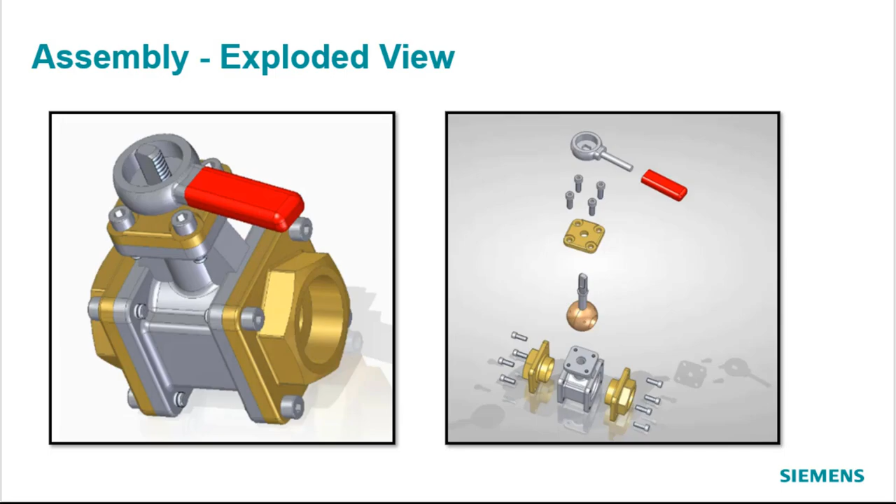Let's take a look at how to explode an assembly back into its individual parts. So start by coming out to your class files.

Assembly. Down at the bottom here you'll see valve done. So not valve, but valve done, to ball valve. And if it doesn't look like that, if it looks like just in a list, just right at the top, it's going to be ball valve. Double click on the ball valve.

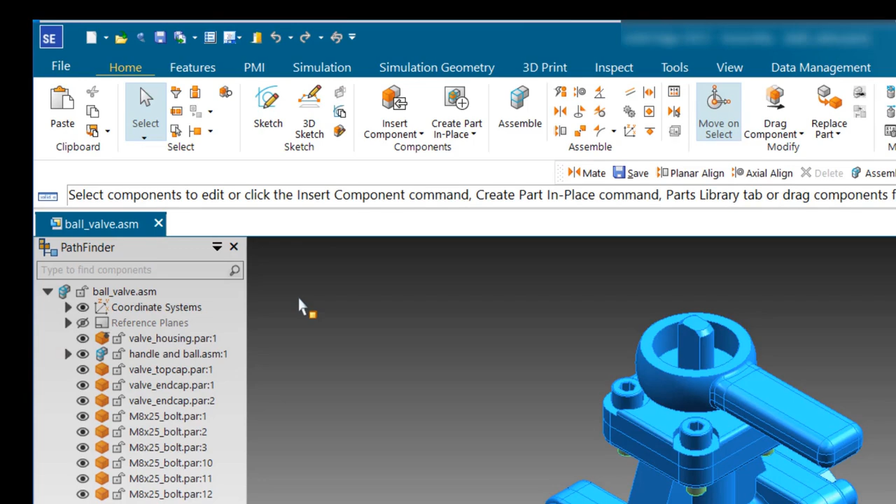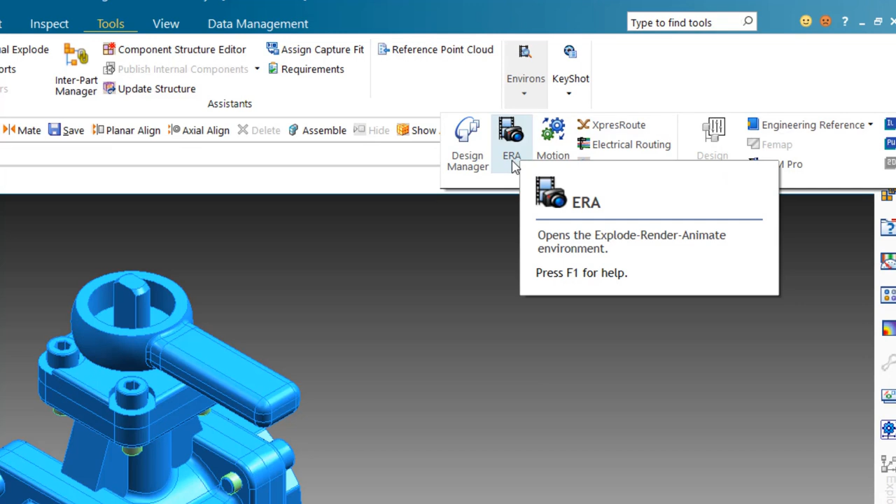And once the file's opened, come over to Tools. And if you've got a big computer, I think this would expand, but right now if it's on a smaller screen, it gets compressed. So I'm going to come over here to Environs, pull down on the Environs and come to ERA, and that stands for Explode, Render, Animate.

Now what I'd like to do is come up to Auto Explode, click on that. I'm just going to take the defaults, green check mark, and explode. Finish. So there the part is exploded.

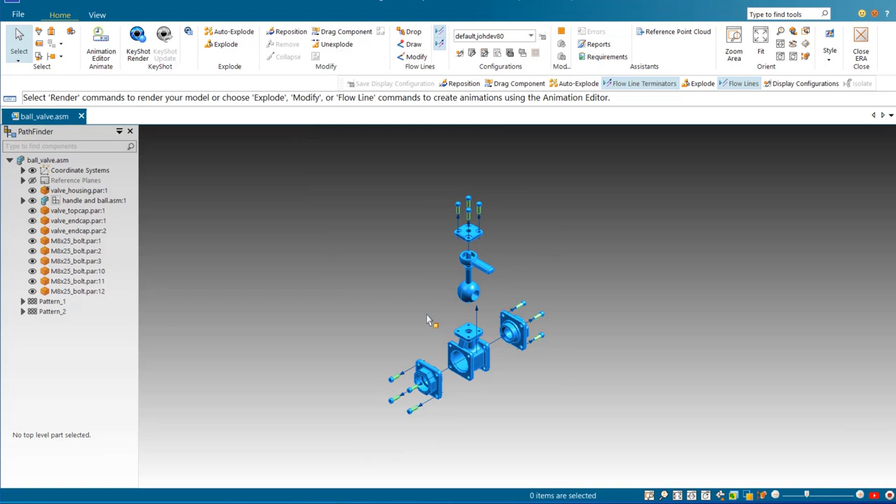Now if you'd like to reposition certain parts, you could come up to Reposition, and let's say I'd like this above the other piece. So I'll select the part, click on another part to place the part next to. So I'll come up here to the top of this screw, click on the screw, and then click on the arrow and say put it above that.

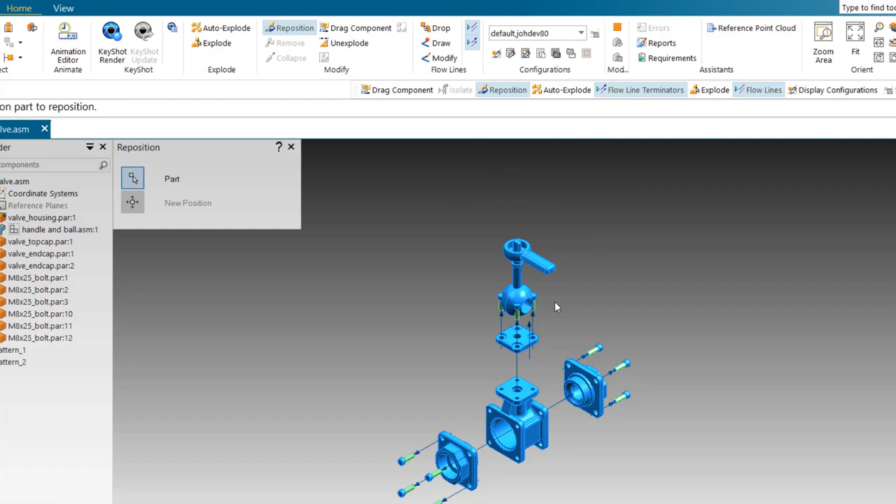Now the spacing needs to be fixed. So I come up to drag component, identify on the component, accept, and the green arrow, just pull that up.

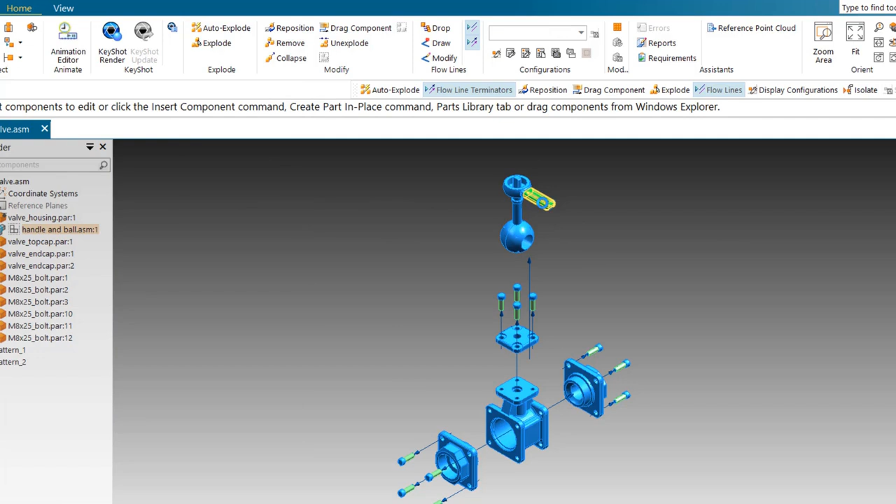Now say I'd like to pull this piece out from the valve here. So I identify that and try to drag component, but it highlights the whole thing. But I only just want the handle and it won't do that. So let's see what's happening there.

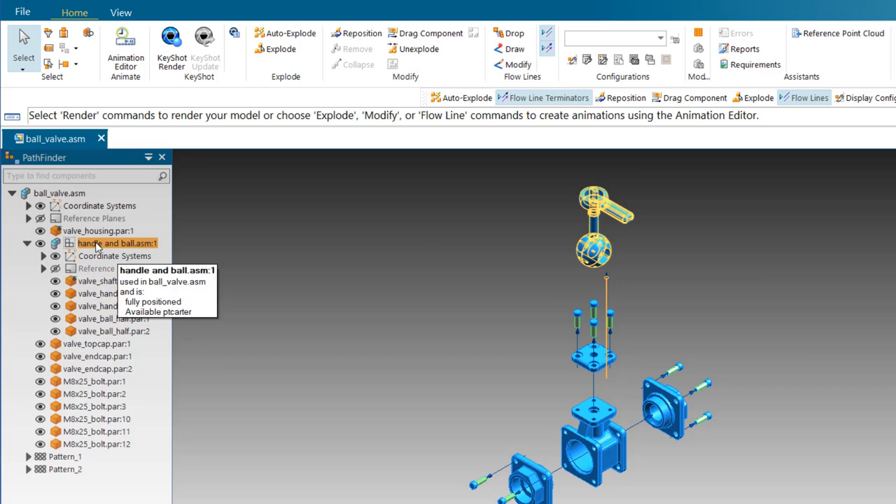If I come over here to the side, this is what's called a subassembly. So in the ball valve assembly, there's something called a subassembly. And that means this got put together separate. So I could come down here and expand on that and look at the subassembly right there under handle and ball. And so how do I just get this apart?

Well, I could come back to Auto Explode, and this time I want the subassembly. So I'll click on the subassembly, green check mark, explode. And now that's exploded the subassembly.

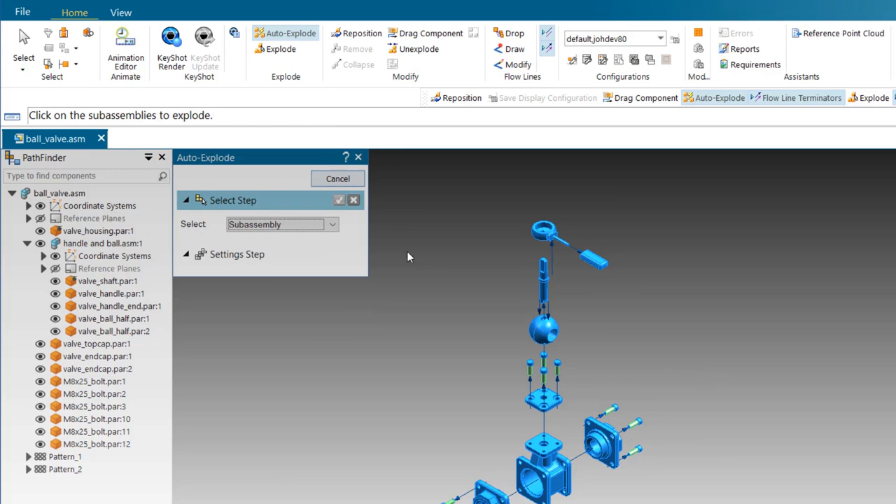And then I could come back, identify the handle now, and drag that out if I wanted to. Just drag along the line. So I could move that out.

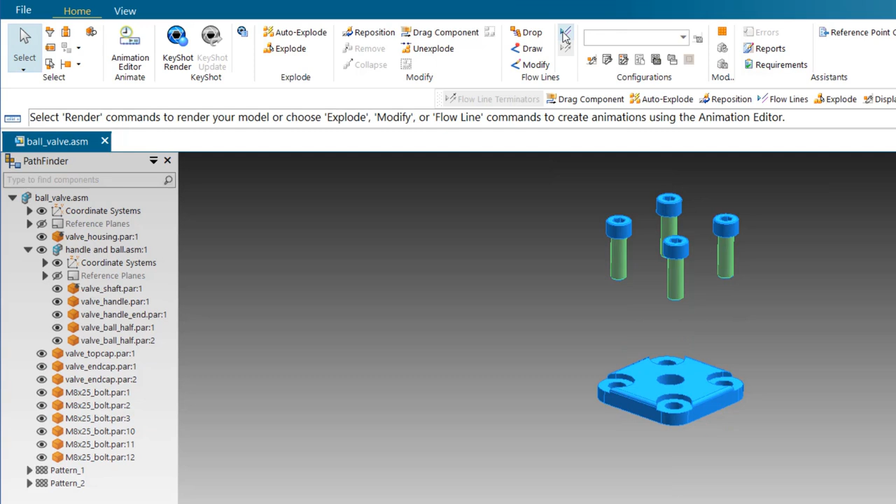And if you'd like to turn off the arrows, the flow lines, just come up here and turn those off. Just turn them back on. And if you'd like to just turn off the arrow heads, they're called terminators, flow line terminators. So I'll turn those off, turn them back on. There's an introduction to exploded assemblies.